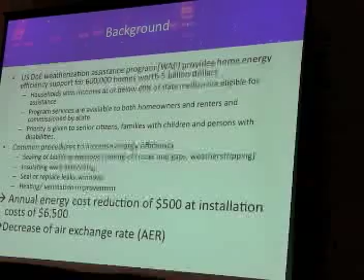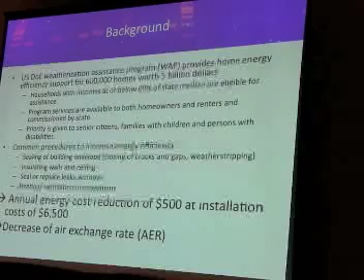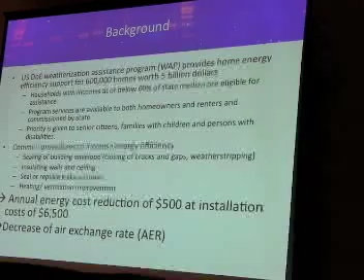The U.S. Department of Energy provides home weatherization assistance for energy efficiency purposes for up to 600,000 U.S. citizens, or homes actually, at a funding maximum of $5 billion, according to a law that passed in 2009. And households with incomes at or below 60% of the state median are encouraged to apply for these funds. And both homeowners and renters are eligible to apply. Priority for this funding is given to senior citizens, families with children, and persons with disabilities.

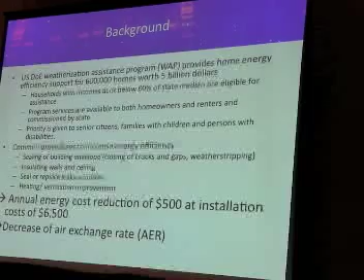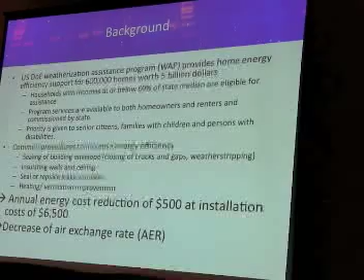And the common procedures to increase energy efficiency in homes within this system is the sealing of building envelopes, and that is done by weather stripping or closing of cracks and gaps. Further, walls and ceilings are insulated, and often leaky windows are being replaced or sealed. Where deemed necessary, also heating and ventilation improvements are being conducted. At a first installation cost of about $6,500, the annual savings per household amount to about $500. So all these measures aim at decreasing air exchange rates in buildings, and we're really interested in finding out how these decreases in air exchange rates affect the indoor microbiome.

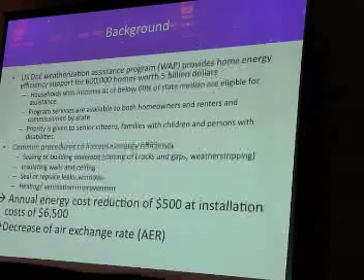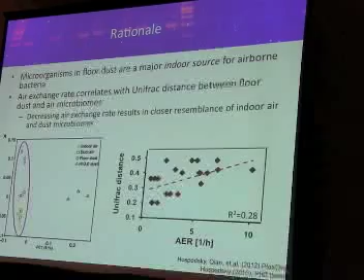We've further shown that the air exchange rate in naturally ventilated classrooms is correlated with the UniFrac distance between floor dust and indoor air. So this is shown here, where basically an increase in air exchange rates results in an increase in UniFrac distance between the floor dust and the indoor air microbiomes. Meaning, if you have increased air exchange rates, the communities in the floor dust and the indoor air are more dissimilar from each other. With that being said, the hypothesis for this research project is that an air exchange reduction from weatherization measures will increase indoor associated microbial sources.

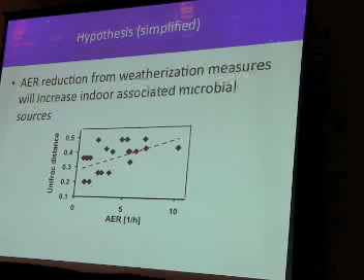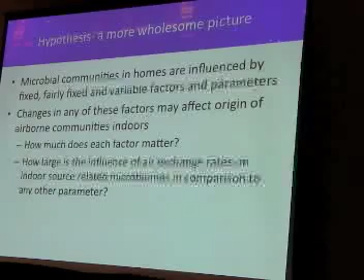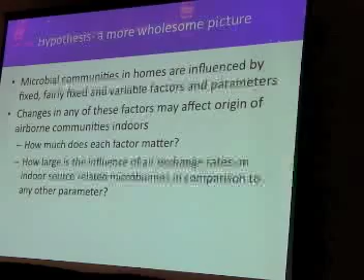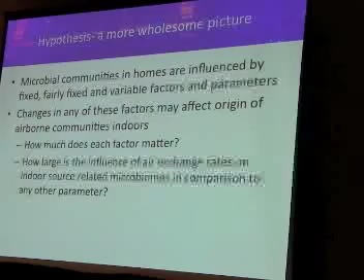However, we've heard and we all know that buildings are complex entities and that the story is just not that simple. There are many confounding factors that might also affect microbial communities. Some of them are fixed, such as climate and location. Some of them are fairly fixed, such as building design. And others are more variable, such as cleaning schedules, activity of the occupants, and other factors. So the question really is, what are the factors that affect the origin of airborne communities indoors? And how much does each of these factors matter? And how large is the influence of the air exchange rate on indoor source-related microbial communities in comparison to any of the other parameters that also matter?

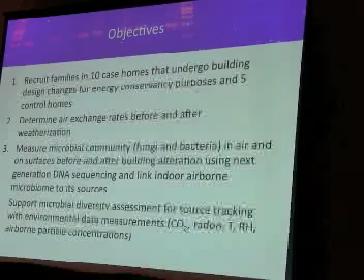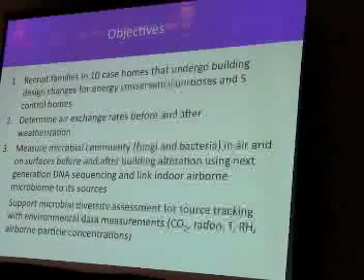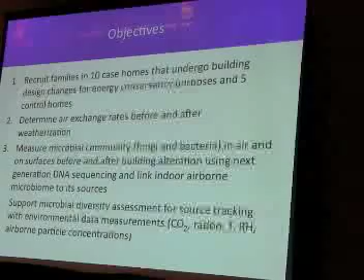With regard to our objectives in the study, we plan to recruit families in 10 case homes and 5 control homes. The 10 case homes undergo weatherization for energy conservation purposes, and the control homes are being kept as usual. We will determine air exchange rate before and after the weatherization takes place, and measure the microbial communities, both fungal and bacterial, in air and on surfaces before and after those weatherization effects take place. We will support microbial diversity assessments, both for source tracking and to just see what's there, with other environmental measurements such as CO2 concentrations, radon concentrations, temperature, humidity, and also particle concentrations in the air.

Because of the many confounding factors that may affect microbiomes indoors, we decided to start off with a pilot study that addresses the question of what factors matter, like trying to tease out what are the wheels that we can tweak. And for that, we have a case home in Pittsburgh, Pennsylvania, that is a whole house retrofit, and a control home in Ithaca, upstate New York.

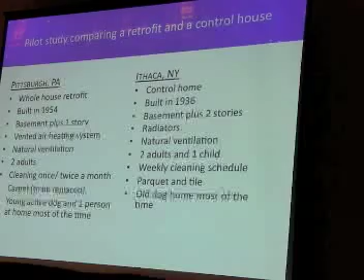The case in Pittsburgh is completely going to be retrofitted with new windows, insulation, and also indoors there's changes that are occurring, tearing down walls and other things that are going on to make that home more to what the homeowners now expect. It was built in 1954, and the homeowners now are the second owners of the house. It's a basement house plus a one-story, and it has a vented air heating system. Otherwise, it is naturally ventilated. Two adults occupy the space, and these adults adhere to a rather spurious cleaning schedule, once or twice a month.

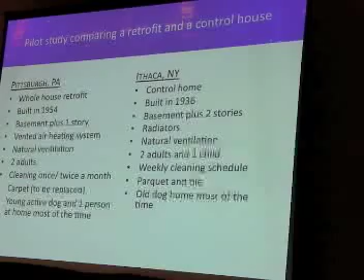There's a carpet in that house that is to be replaced in the course of this study. The Ithaca control home was built in 1936. It's a basement plus 2 stories, and it's heated by radiators. It's a naturally ventilated building, and it's occupied by 2 adults and 1 child. They adhere to a very strict weekly cleaning schedule. The flooring is parquet and tile in this place.

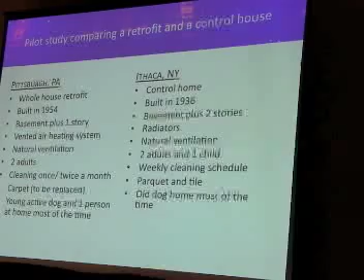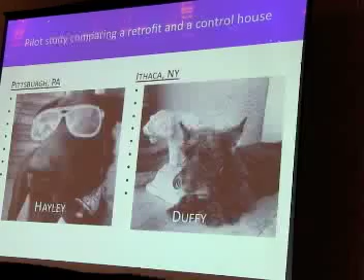And one thing I want to mention, we hear about this more and more in studies from our friends in the community, is that both places have a dog as a pet. And I think we really ought to pay attention a little bit to the Hayleys and the Duffys, and also measure their microbiomes within the house and the indoor microbiome.

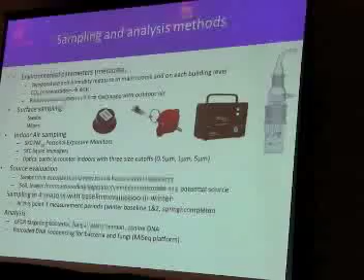With regards to sampling and analysis, we're performing a range of measurements, including environmental data measurements, temperature and humidity, CO2 concentrations to infer air exchange rate, and radon concentrations to assess the exchange with the outdoor air. For surface sampling, we use swabs and wipes based on previous method development in the Peccia Lab. We use SKC personal exposure monitors as well as liquid impingers for airborne sampling. And we also assess the particle concentrations in real time with optical particle counters in 3 size ranges.

As for source evaluation, we're taking swabs from the occupants and the pets to link the houses to the occupants as well. And we're taking samples from the close-by vegetation to track that as an influence. We plan to perform sampling in 4 seasons, where we have done 2 seasons, winter and spring, as we started in the winter, and we have 1 additional measurement as a baseline. So 3 sampling campaigns in each place at this point.

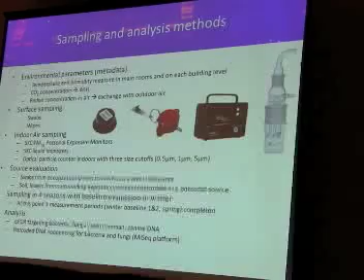Quantitatively, we're going to assess bacterial and fungal DNA, targeting universal primers based on previously developed methods. And we're working also with our former collaborators on assessing quantitative DNA targets for plant, human, and canine DNA. With regards to microbial diversity assessment, we will perform barcoded DNA sequencing using the MiSeq platform.

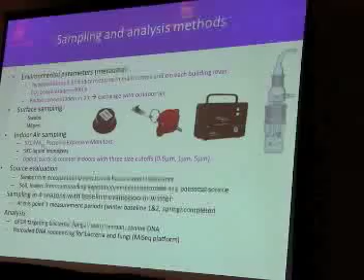What I want to focus on in this talk, though, and I think Brent has given a very good introduction to that, is how we can use some of the environmental data, our binders full of metadata, to already gain some knowledge about what is going on with regards to exchange between indoor and outdoor in homes. I will also show some results from the personal exposure monitors at the end.

All right, so I mentioned there have been 3 sampling campaigns conducted so far in each place. They were in Pittsburgh, in our case home, in February, March, and May, and then in Ithaca in March, April, and May. In Pittsburgh, we had 2 winter condition measurements and 1 spring condition measurement. And in Ithaca, we're dealing with the winter months on the verge of spring.

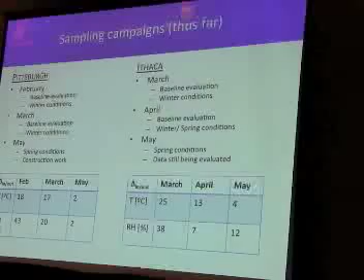And that is important if you look at the temperature and the humidity, shown here as delta T and delta RH. As we move from winter to spring conditions, we see that the delta T and the delta RH reduce, and that already tells us a little bit of what's going on with regards to what is indoors, what is outdoors, and where it merges a little bit. There we go. All right.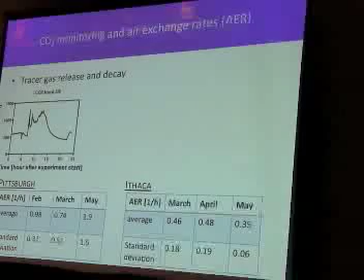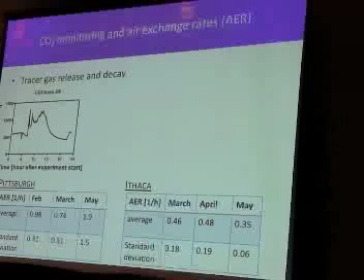CO2 monitoring is a very useful tool, as Brent mentioned, to also check the occupancy in the rooms. Again, these are private homes. We can't be there all the time and keep track of what is going on. So we're using the CO2 tracer as a surrogate for human activity in the room.

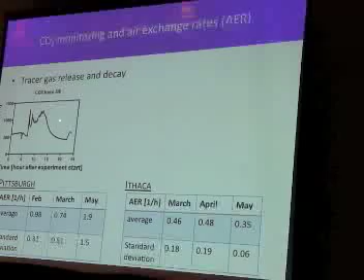A typical CO2 trace looks something like this over 24 hours, where you have the CO2 level in ppm over time, with moderate activity in the morning, 2 deliberate CO2 releases to then measure the decay, the family coming home in the afternoon, the CO2 level rising, decay overnight, and then starting again in the morning.

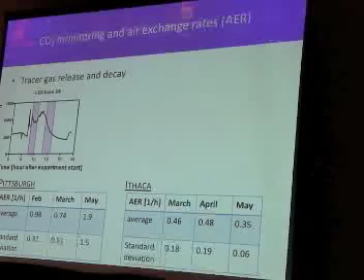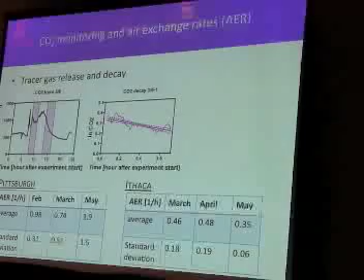At so-called windows of opportunity, we can measure the decay by transforming the CO2 concentrations to their natural log and then measuring the slope of the linear regression, which gives us the air exchange rate. So this is for number 1 and for number 2. And over the course of sampling, we do that for all the windows of opportunity we create or have, and average out the air exchange rate.

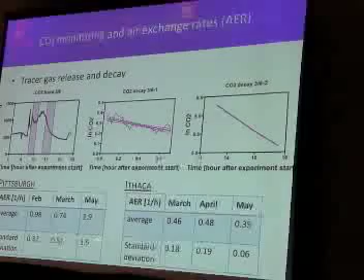In Pittsburgh, the air exchange rate in the 3 sampling campaigns varied much. In the winter months, there was about one air exchange per hour, and it doubled in spring.

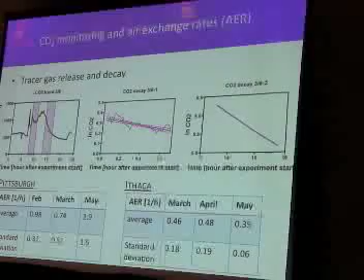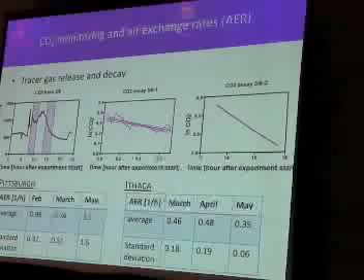And here it's important to keep in mind that the air exchange rate here partially results from the heated ventilation system that is on and that is transporting air through the building and actively pushing the air through the building.

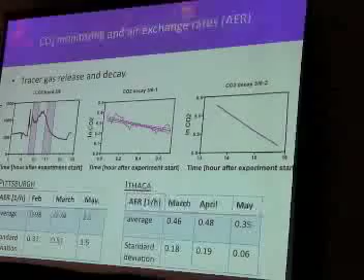And in Ithaca, and this is in May, we see that air exchange rates are mainly due to natural ventilation. In Ithaca, the control home has very stable air exchange rates from 0.3 to 0.5 air changes per hour. And there's really not much going on that end, which is also interesting for future analysis as we go through all the data.

As I mentioned, we also measured radon in indoor air, and here I want to show how radon measurements can supplement air exchange rate assessments from CO2 monitoring. As Brent said, we have to do some due diligence, and this would be another tool that we could add on to get some more information about what is going on with the indoor system, seeing it as a system where things are occurring. How do we assess that? How do we get something out of it and relate that to the indoor microbiome?

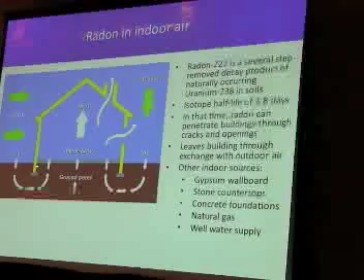So radon-222 is a several-step removed decay product of naturally occurring uranium-238 in soils, and it has an isotope half-life of 3.8 days. In that time, radon can penetrate the building through cracks and openings, mainly in the basement, and it can only leave the building by exchange with the outdoor air. Other indoor sources for radon include gypsum wallboards, stone countertops, concrete foundations, and if present, natural gas and well water supply.

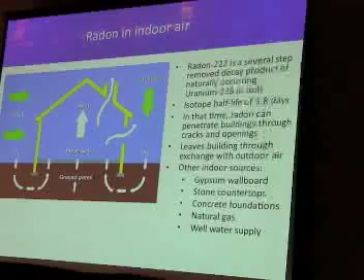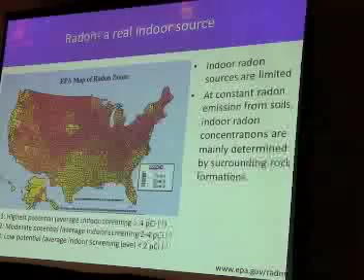With the indoor sources being limited and a constant radon emission from soils based on the presence of uranium-238, the indoor radon concentrations are mainly determined by the surrounding rock formations. So in fact, the US EPA has issued a map of county-by-county radon zones, dividing into 3 different zones from 1 to 3, based on indoor screening levels, where the highest potential for detrimental health effects is associated with levels above 4 picocuries per liter. And so we see that both of our sampling sites are located in these high indoor screening zones. And we can see that when we actually look at our data.

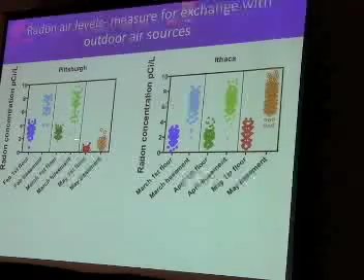This is radon concentrations in picocuries per liter in the 2 different sites measured in the basement and in the first floor, and the 3 different seasons. And so what we observe here is, first of all, in the Ithaca control home with constant air exchange rates, we see very constant levels of radon in air, both in the basement and in the first floor. In the Pittsburgh chart, we see constant levels in the first 2 months of heating in winter, and then we see a rapid decrease in radon concentrations in indoor air.

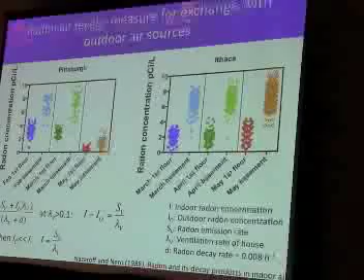Giving some credit to my other mentor, Bill, the indoor radon concentrations can be determined from its sources and its removal, where we have an indoor emission rate, and also outdoor radon penetrating the building envelope via the ventilation, with removal occurring via ventilation and decay.

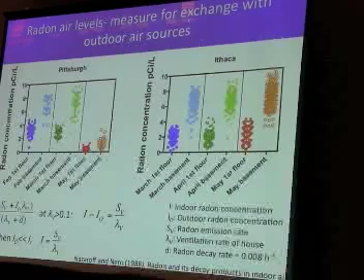So at air exchange rates above 0.1, the decay of radon becomes negligible, and also with concentrations of radon indoors being much higher than outdoor concentrations, we see that this whole equation simplifies to indoor radon concentrations being equal to the sources, so the emission rate, divided by the ventilation rate. So we can use the radon data to infer something about the ventilation rate in the building. And that is another very useful tool for assessing the metadata and what is going on with regards to indoor-outdoor sources.

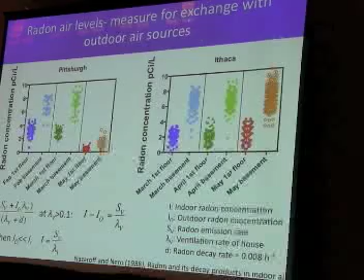And this becomes more clear, I think, if we look at the hourly data, where we have the 3 different sampling campaigns in Ithaca on the first floor radon concentrations. We see that there's a lot of variation over the time of sampling, and that at low concentrations of radon, we probably have a high air exchange rate in the entire building, and at high concentrations, a low air exchange rate. So that is something else where radon can provide a measure for air exchange with the outdoors, and that tells us something about the sources as well.

So I just really briefly want to highlight particle concentrations in micrograms per cubic meter, PM10, particles with an aerodynamic diameter smaller or equal to 10 micrometers in size. These are our different campaigns, and the numbers here are the mean concentration from replicate measurements with the PM10 samplers. What really sticks out is the high concentrations in May, and what we have going on here is construction in the building. And the question is really, are we also going to see an increase in fungal and bacterial communities in this case? And if so, is that maybe also a source for microbes?

And then even without that, just looking at the concentrations in Ithaca and Pittsburgh, in Pittsburgh they're at least 3 times increased over the Ithaca control case.

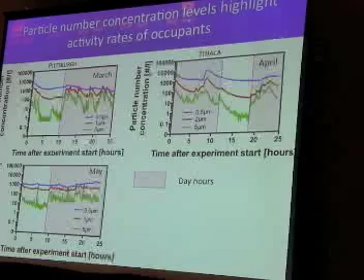Another interesting aspect here are the spikes during the decay period at night, particle concentrations. And we suspect that this is from the ventilation air duct that kicks on at night to heat the building. And we're going to investigate whether we see duct microbiomes in our indoor air samples as well. All right, I'm just going to highlight briefly that the concentrations here in the Ithaca-controlled case overall are just not as high as in the Pittsburgh case, and we could just confirm that potentially the carpet is the source. All right, this is my last slide, I believe.

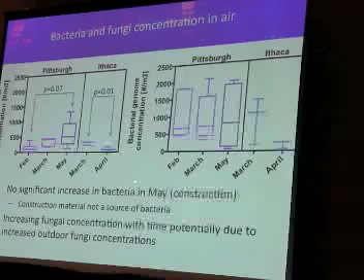Fungal genome concentrations and the particle PM10 samplers, and the different sampling periods. We see for fungi that there's an increase in fungal genomes in the May period, in the spring period, and there's a question whether that is due to the construction going on or just to more air penetrating the building from the outdoors. And hopefully the DNA sequencing data will inform us about that. And that's where it really becomes a powerful tool to combine these two different types of assessments.

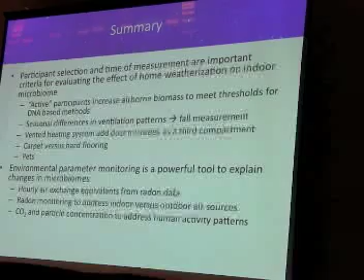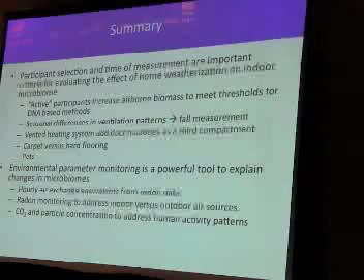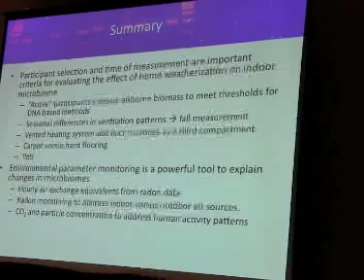As for summary, we'll pay close attention to participant selection for our rollout and also to the time of measurement. Probably going to look for active participants where we suspect a lot of dust, so we actually meet our detection limits. Pay attention to seasonal differences. A good measurement time would probably be fall. Maybe exclude houses that have a vented heat system, as it also adds a third component that we need to control for. Pets are important, carpet, I mentioned that. And again, combining these method approaches from different areas has shown again that this is a very powerful tool to tell a whole story.

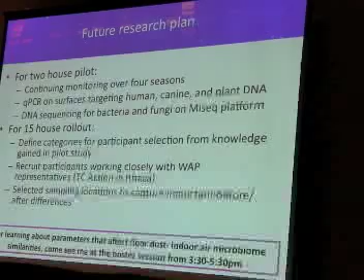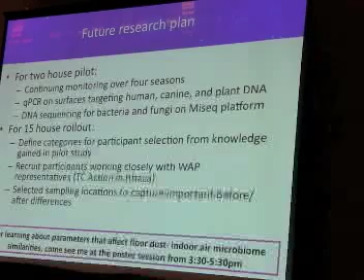I think we ought to all work on this together. I'm going to skip that in the interest of time. But I do want to mention that I have a poster, so come and see it, on my old Sloan work that is done with Jordan Peccia. And it's about how different parameters affect the indoor air to floor dust UniFrac distances. And with that, I'd like to thank you for your attention.

It seemed like the only thing you had in common at all with the two houses was the dog. So I'm not exactly sure how you're going to make some really strong generalities. I mean, you might use that to your advantage, that all these houses are completely different, cleaning and everything, but there's one thing that is the same between them. I mean, is that the plan? It's a crazy number of variables.

That's right, that's right. What we're particularly interested in is really seeing how we can use some of the environmental data to infer what is important and what is not, in combination with the microbial diversity assessments. So I think with the combination of the two, we can actually tease out a lot of these factors. And the measurement over time will also tell some of what is important and what we can neglect.

The assumption that you're making with your exchange rate is that the space is fully mixed, and in particular with these older houses that are naturally ventilated, that's really a big assumption. Basements have their own exchange rate that can differ considerably, so using radon has got to be checked to see if it's working. Oh, I absolutely agree, and I think all the building scientists in the room would prefer that. So, all three of them.